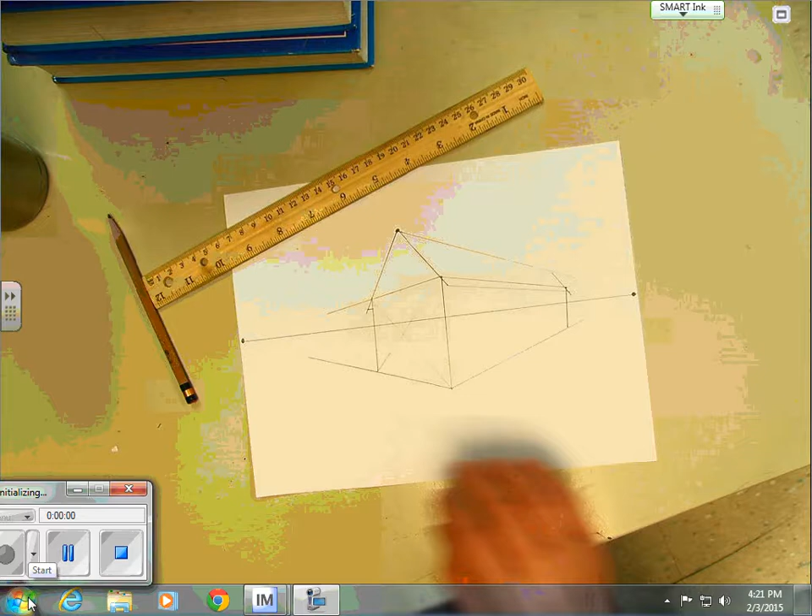Okay, in this second video, we are going to make an L-shaped house. An L-shaped house is basically like you have the main house here, and if we were looking at this from the sky, we would see a projection like this. We would have a peak right here, and we would also have a peak right here.

Most of the houses that you see around are going to be like this or even fancier. But to leave a house just like this is not that realistic anymore. It's way too plain. All right, so an L-shaped house is, here's the main house and here's the projection coming off. As I said in my previous video, I made this side longer just for that purpose.

So at some point in the center here, I'm going to start with a vertical line. And when I draw this vertical line, I go from the bottom of the house all the way up to the box line. Not the roof line, but the box line. You can see that it's right there. I'm going to zoom in just a little bit. So again, box line here, and then bottom of the house right here. So I'm going to project from these four corners, here, here, here, and here.

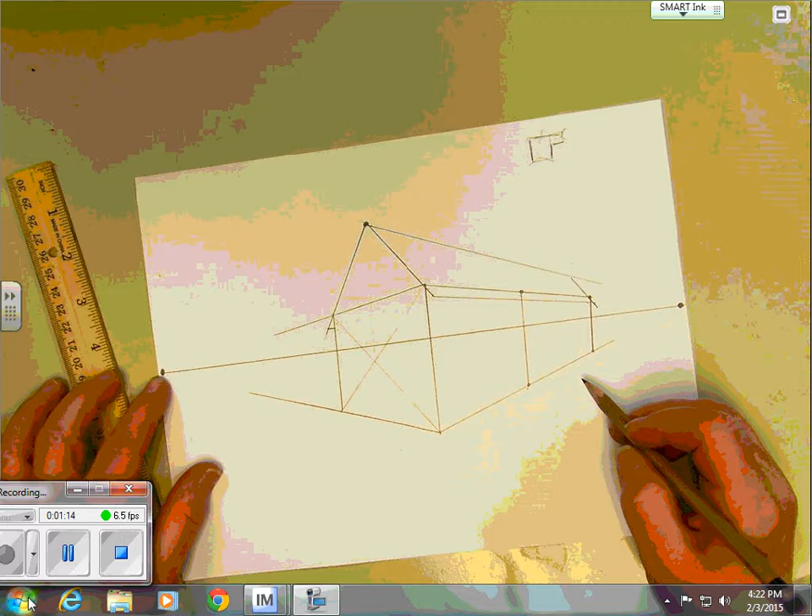And I need to project away from the house, and I do that by going from the opposite vanishing point out. And another tip that I'm going to encourage you to follow is always put your pencil down on one of the points first. So I'm lining it up with my pencil and the left-hand vanishing point, and then I draw my line away. So I'll do that 4 times, 4 points 4 times.

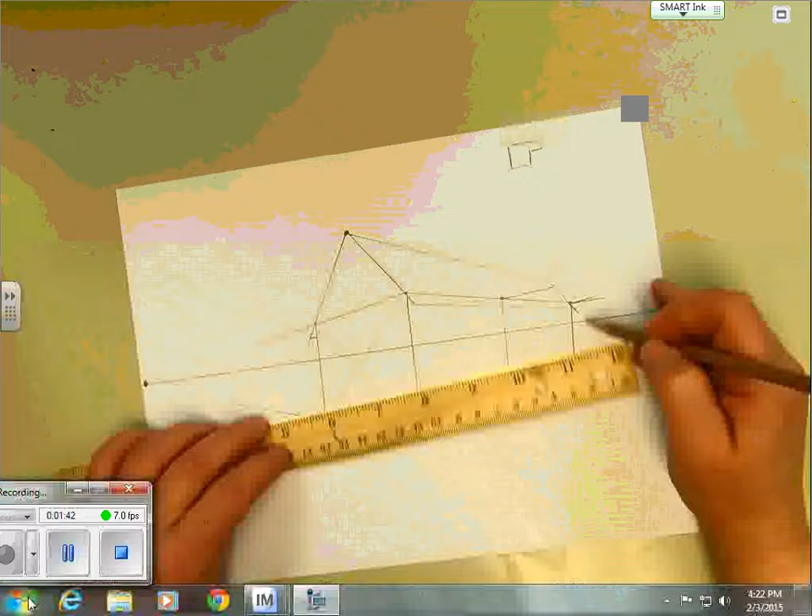You'll notice that my lines go up as I'm above the horizon line. All right, whoa, that one was off. Let's try that one again. And the last one is right here. So this would be as if we had boards coming out from the house, if we're actually constructing this. So what we need to do is make this into a wall.

So I'm going to stop these 2 lines, these are the lines that are closest to us. I'm going to stop them with a vertical. So if I line it up, slide it back, there's my vertical. Then I need to connect this and make the right side of this projection. So I'm going to go to the right-hand vanishing point until I hit that back line. There's that back line right there.

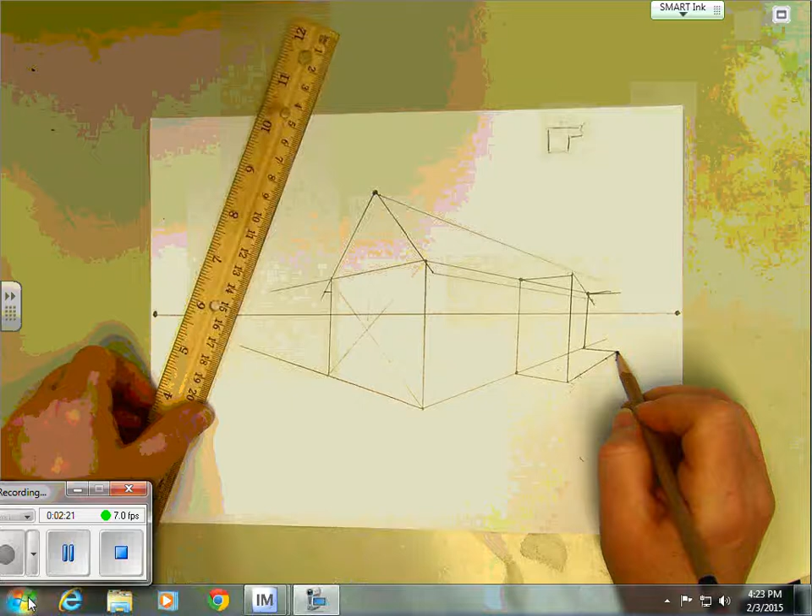Let me straighten up my paper. So again, that went to the right-hand vanishing point until I hit the back line. Now I need to do the same thing right here. I'm going to line it up with the right-hand vanishing point, and I will draw a line until I hit the back line, and it happened to be right there.

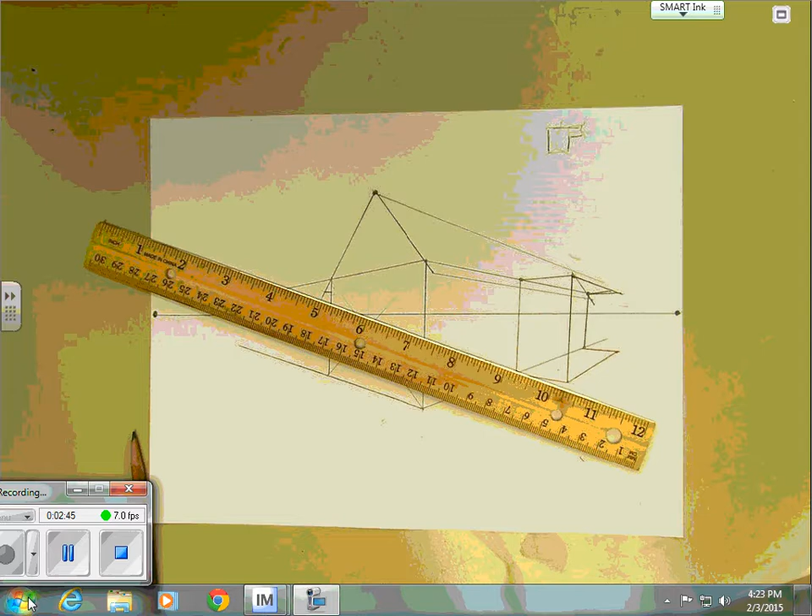Now, sometimes it gets kind of confusing because there's all this stuff in here, and it's got to be erased eventually. So whenever you're comfortable and you say, hey, I want to erase that, go ahead and do it. For me, I know what I'm doing, but this might be a good time to say, hey, I've got to erase some stuff here. It's just too busy, too many lines, and it's confusing. We wouldn't even see that back corner right there. We just needed that to establish where the frame of this projection is.

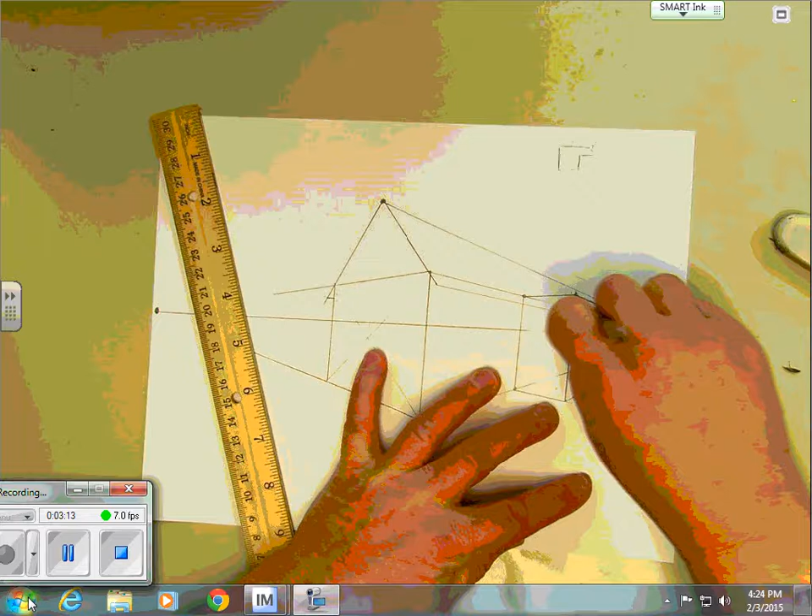But you can see right here, I have a corner line here, and that's pretty close to a vertical. It should be very close to a vertical. If it's not, you were off somewhere in your construction area. All right, but here you go. That's the basic construction of the L-shaped projection, but we need a roof.

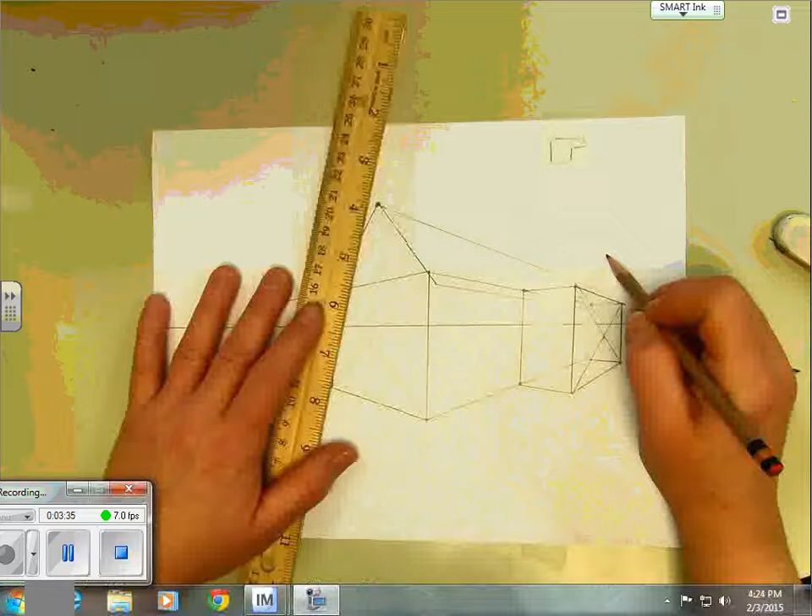Now like I said, this peak is going to be here. So I want to find the center of this, and I'm going to go from corner to corner to find the X, just like I did over here. Once you find the center, you can line your ruler up, go straight up for where you think the height of this peak is going to be. That's the peak. And then I'm going to connect it to the corners of my projection here and here. That little line right there for the overhang is hard to see, but it is there.

And then I need the top of this peak. Well, it's got to go to the vanishing point. So I'm going to line it up just like that, and I really don't know where it's going to stop yet. I could take a guess, but I'm just drawing it far enough, and I can always erase.

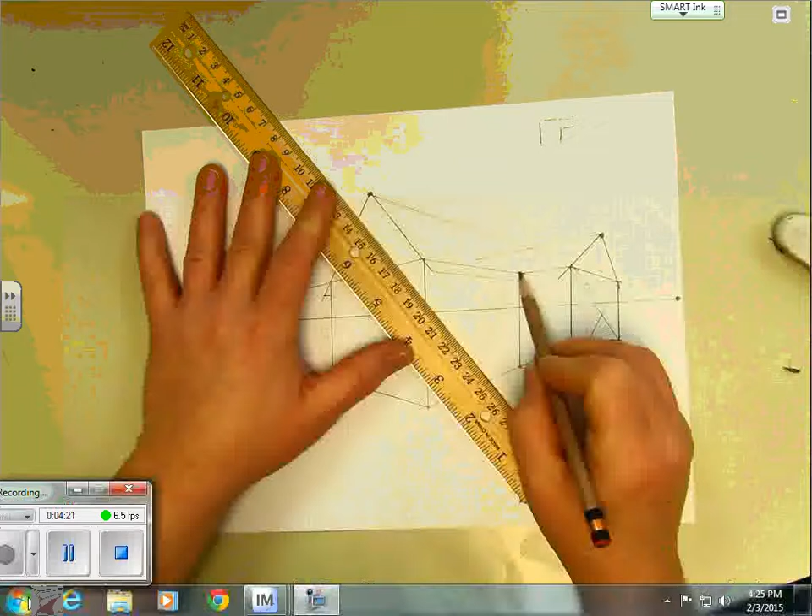So somewhere in here, I need to have a roof line that connects this roof to this roof. And the best way to do that is to have a line that is parallel to the original diagonal roof line right there. And so I also have to make sure that line goes through this little point. That's where these 2 boxes connect. And I purposely made a dot there. So I'm going to put my pencil on that.

I'm going to line my ruler up with the diagonal for the original roof line, and I'm going to slide it back until I hit, and then I can draw this line. Now, notice that when I drew that line, it hit the point. It hit this roof line, but I also went until I hit this overhang right here. This is the roof line right here for my original house.

Now I need to draw this line right here, the overhang. And so I'm going to go from this point to the left-hand vanishing point, and it's going to go up. Again, it goes from the left-hand vanishing point though. And there you go. There would be a little bit of an overhang here. Go to the left-hand vanishing point, and there you go. I have a basic house in 2-point perspective with the roofs on and everything. So I'll stop it, and that'll be the end of this video for now.